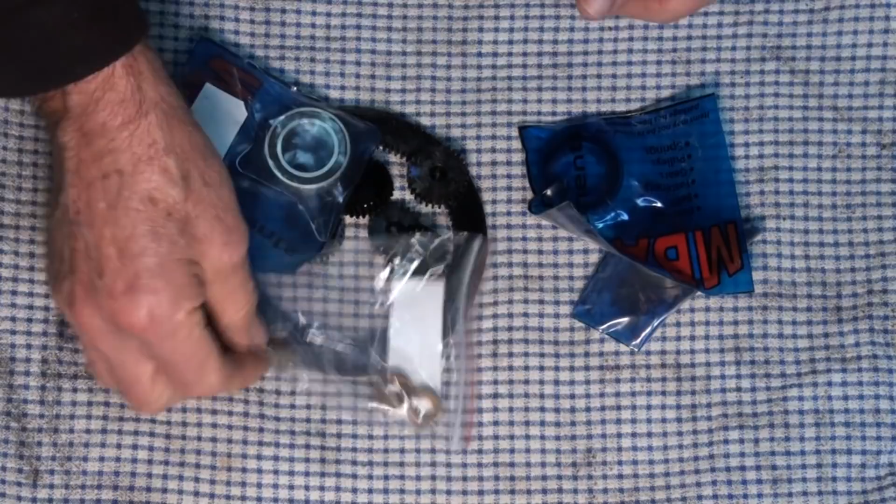Starting a new project today, and here are all the meaty bits that are going to become part of this project. If you are watching this, you probably have an interest in machining and engineering and power tools, that sort of thing.

And I'm pretty sure you've probably come across Mr. Pete, or Tubal Cain as he calls himself. He's done literally zillions of videos on model engineering and engineering processes.

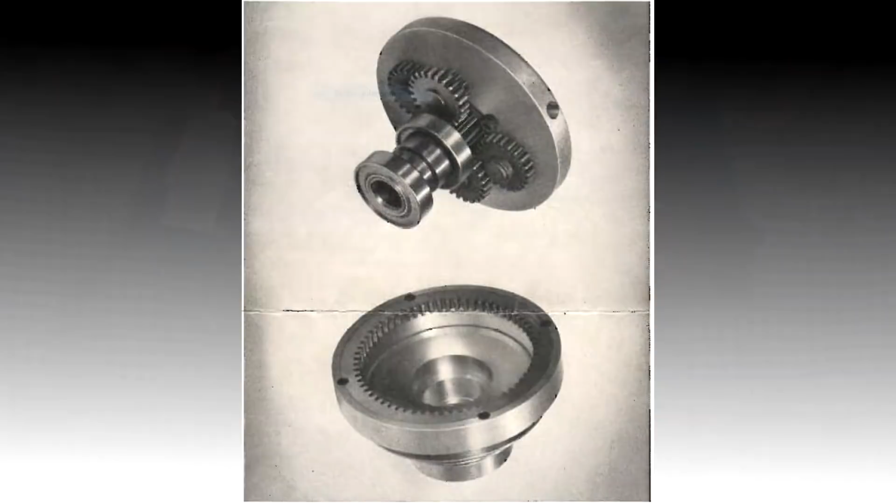One that caught my attention just recently was a device known as a pull gear. These were apparently available back in the 50s and 60s, and they were an accessory for a drilling machine which allowed you to get an extra low range of speeds from the drill press. My drill press, which we'll have a look at in a minute, has the same problem. I cannot get enough torque at low speeds to use large drill bits and large hole saws.

The pull gear is a patented product, but evidently they're not available anymore. In Mr. Pete's video, he showed some patent drawings which demonstrated the internal workings of this thing, and I took one look at it and figured that I can make that.

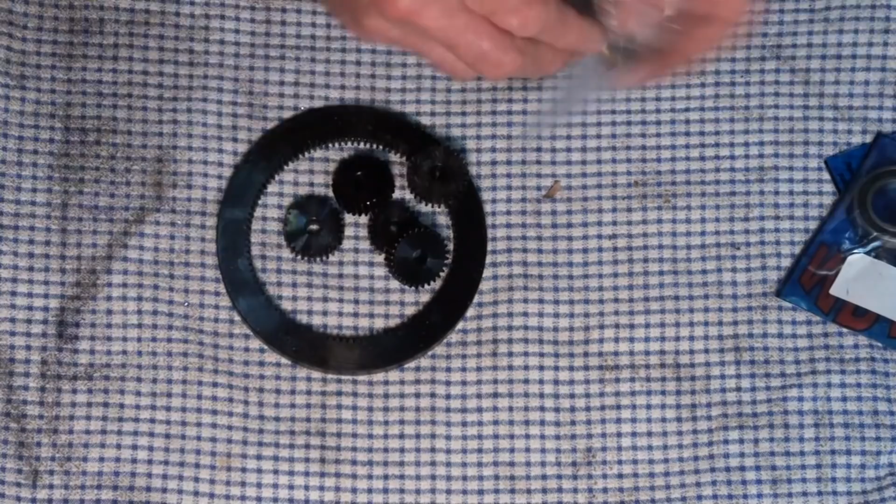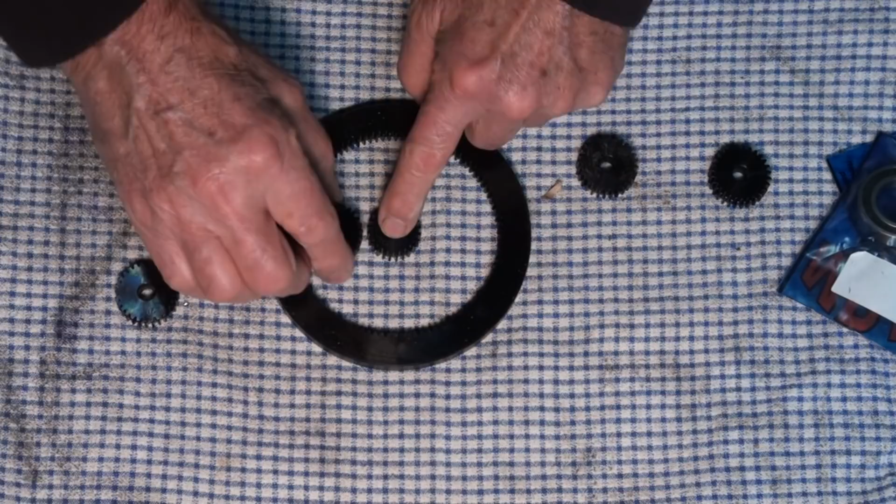So what I've done is I've purchased some gears. I don't have facilities for making a ring gear like this one, but what I have is enough gears to replicate the mechanism that I saw in Mr. Pete's video. So what we have now is an epicyclic gear mechanism.

The notion is that if you were to rotate this central pinion, it would in turn rotate the other set, which are all the same number of teeth, and they in turn would drive this ring gear around the outside. Or if you were to lock the ring gear and rotate the central pinion, then these extra 4 epicyclic gears are going to rotate around that central pinion. That is the mechanism I want to replicate for this drill press.

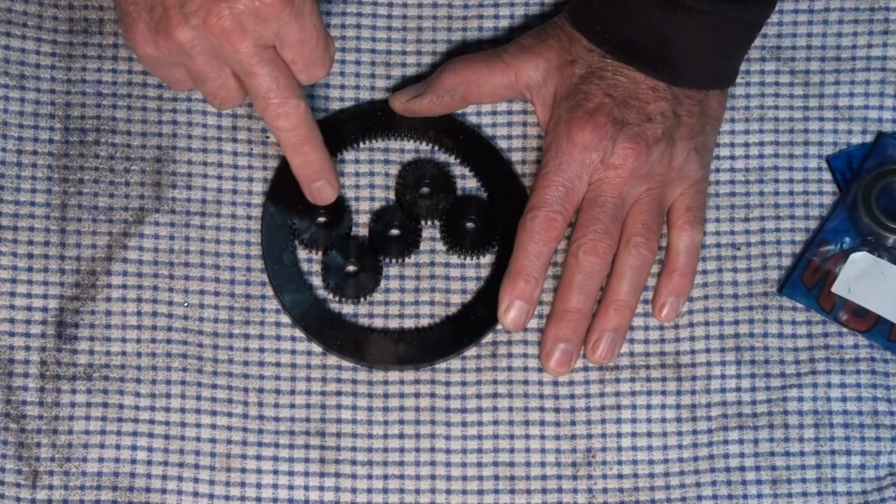So let's take a look at the drilling machine and the problem I have with that, and then let's have a look at the drawings of this device that we need to make.

This is my drill press, a Toolex brand. It was Taiwanese, and I think it was manufactured sometime in the late 70s. I purchased this one second hand. When I bought it, the pulley system on top was partially incomplete. It originally had a 2-belt system driving an intermediate set of pulleys, but because that was missing, I decided to upgrade it to a Poly V drive.

I had read in a magazine years ago that Poly V drives are generally quieter, they run cooler, and they can transmit more torque around smaller diameter pulley sheaves.

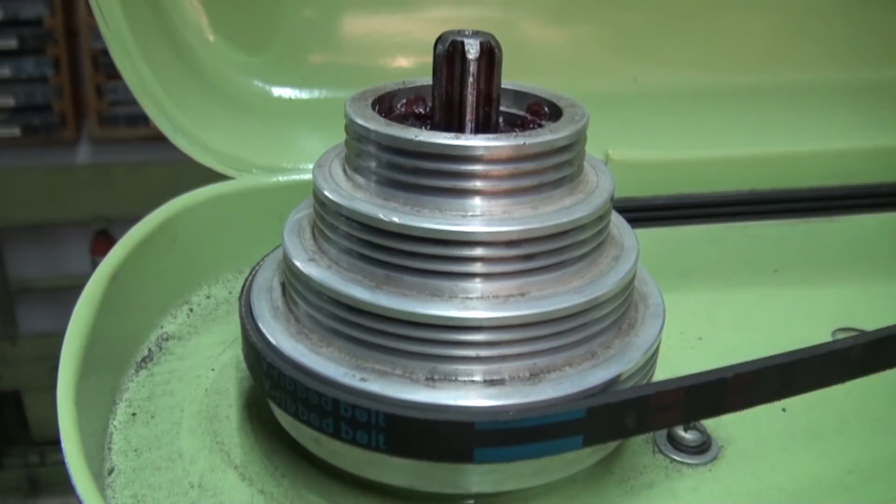The only problem with this configuration is that I have a Huanyang VFD driving a 3-phase motor. I think it's a 0.75 kilowatt 3-phase motor. On 50 Hertz I can get a lowest speed of 480 RPM.

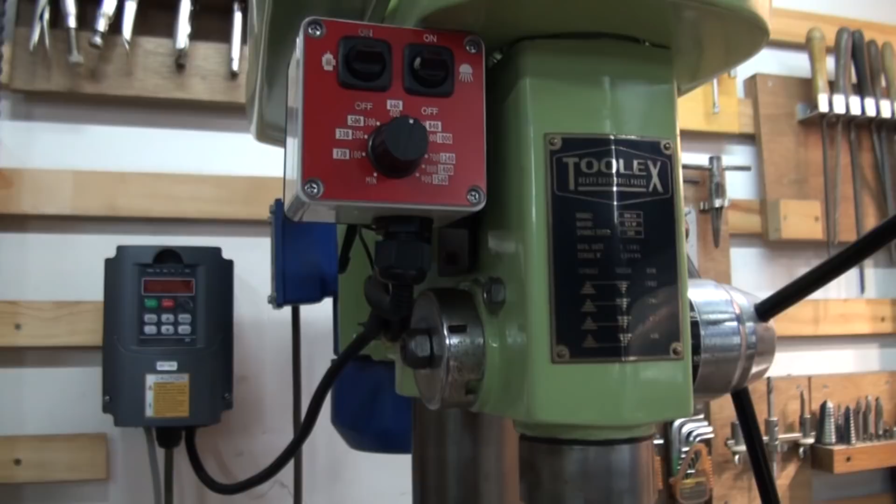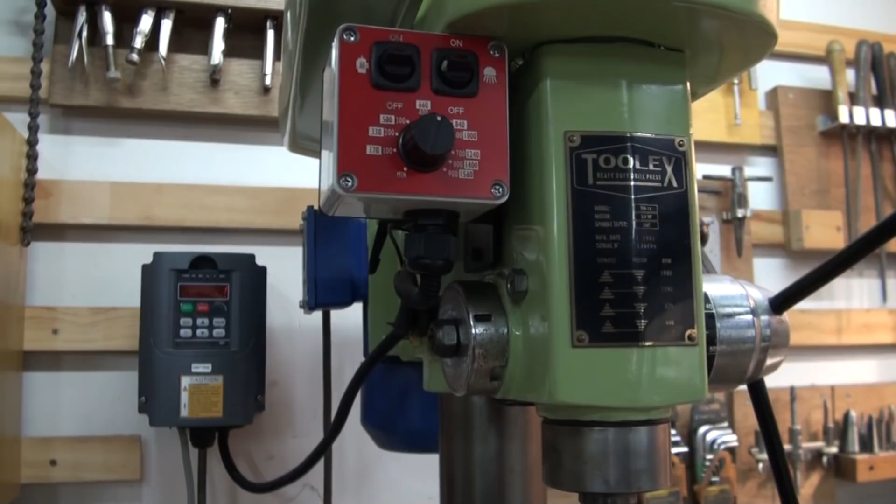Even at 480 RPM, if you're using a large diameter drill bit, say a 16mm or 20mm drill bit, that's really too fast. And if I lower the speed of the motor by adjusting the Hertz, or the frequency of the drive, then the power drops off as well.

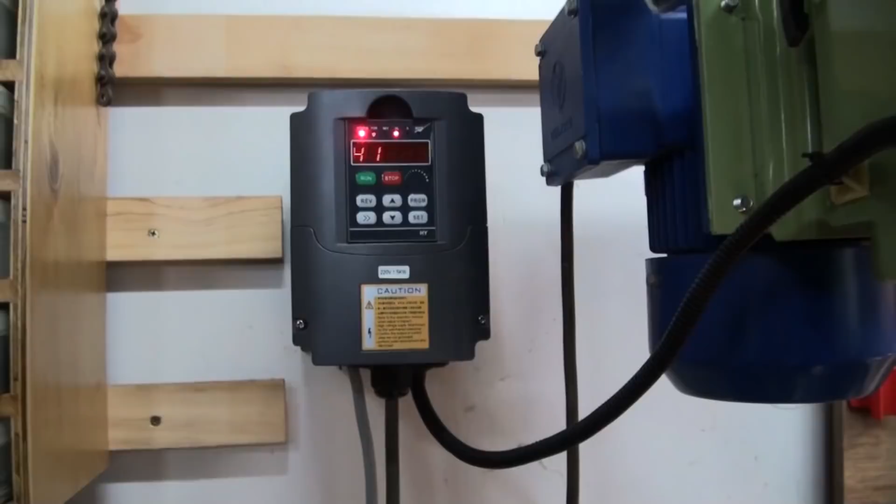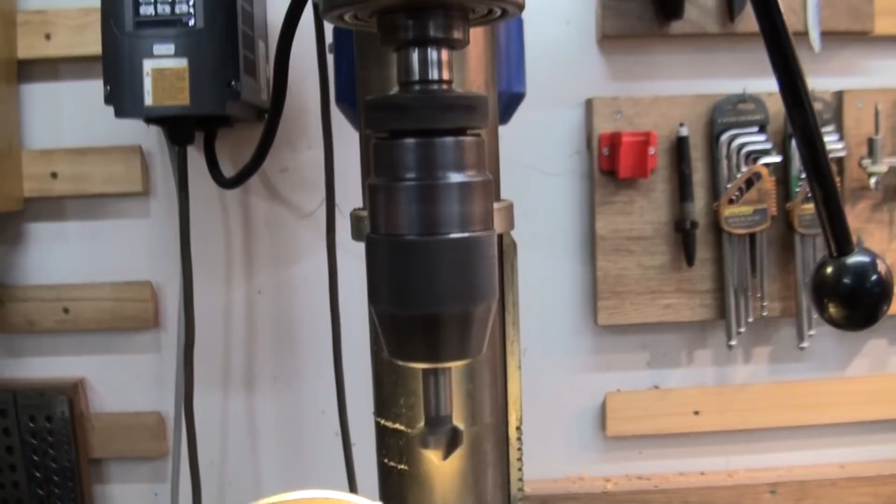I've got the frequency set on the drive at the moment at about 18 Hertz, maybe 19 Hertz, and if I switch the machine on, you can see that on my lowest pulley configuration, or my lowest ratio drive, that's about the RPM that I'd want to run a large diameter drill bit at.

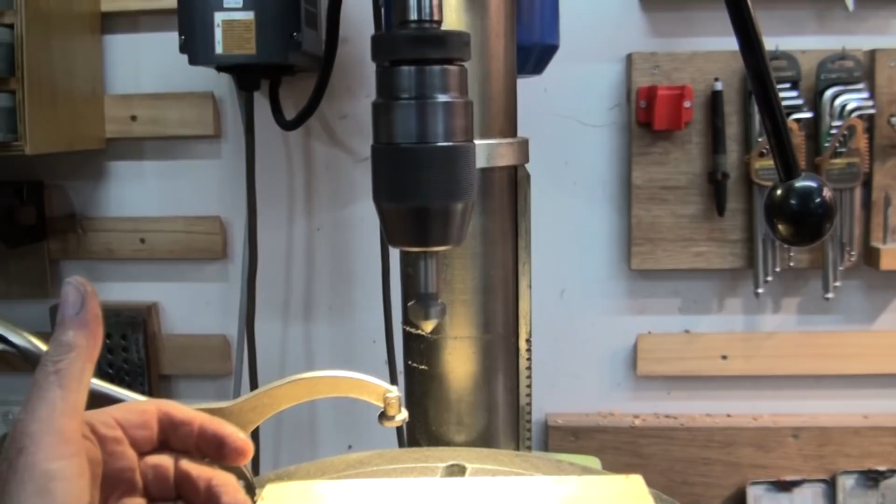The only problem is that when you lower the speed or the frequency, you also lower the torque. So I can just grab hold of that chuck and I can effectively stop it. So that's really not sufficient torque to drive a large diameter drill bit, and that's what I'm hoping this back gear is going to address.

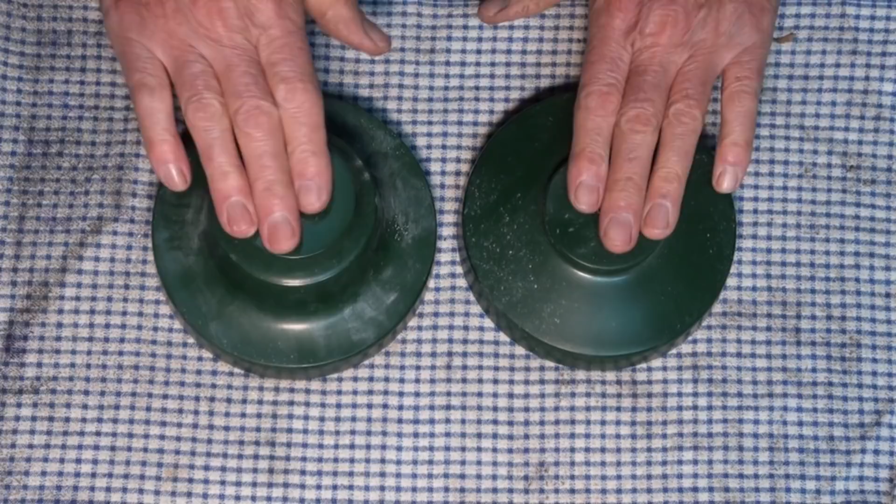Okay, so in order to get this project underway, what I need to do is make 2 castings for this back gear. This is the pattern for the step pulley section of the back gear, and it will be machined into 3 stepped pulleys to take a Poly V belt.

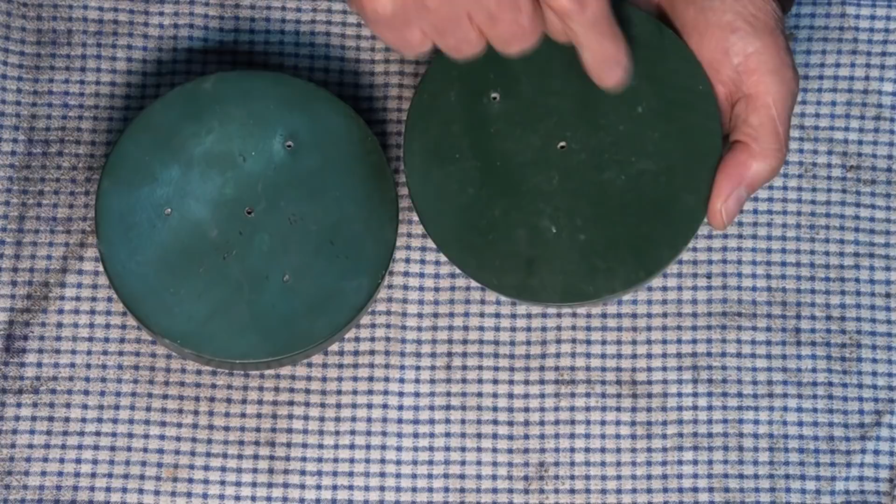And this is the pattern for the cap section, which will take the 4 gears around that central pinion. It will also be locked in place when you want to engage the low speed for the back gear.

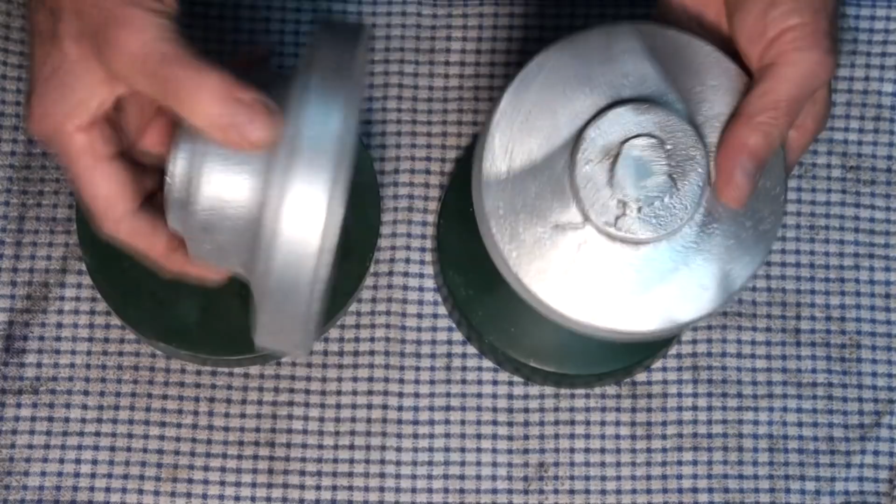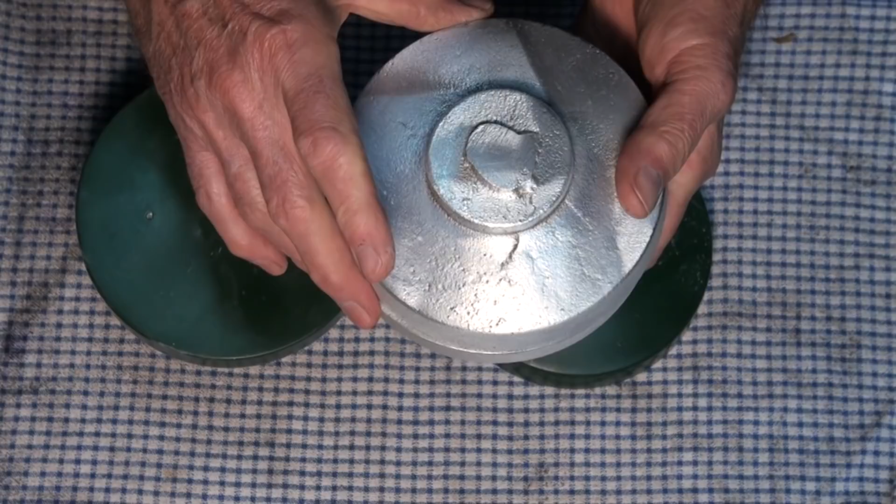These are the castings, and although they're not the prettiest castings in the world, they will serve my purpose. They're also surprisingly quite heavy, which might actually be a good thing. It's going to give it sort of a flywheel effect at low speed, especially when you're doing intermittent cuts like you might get with a fly cutter or a hole saw or something like that.

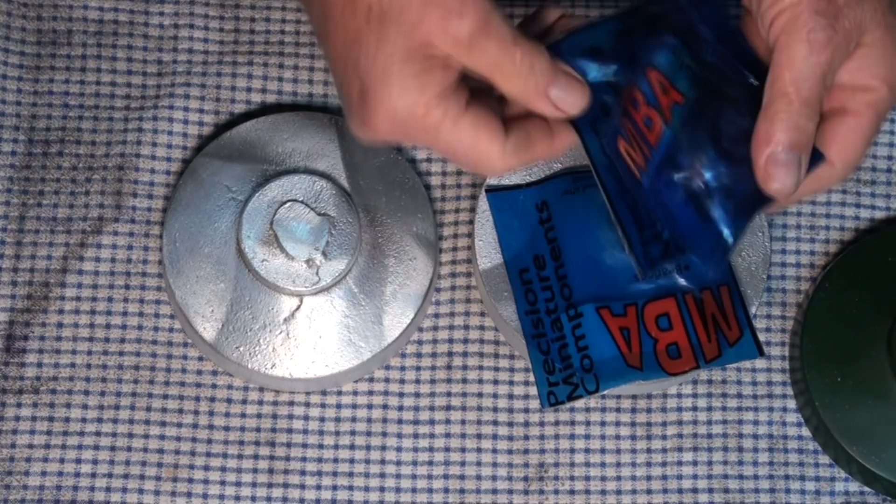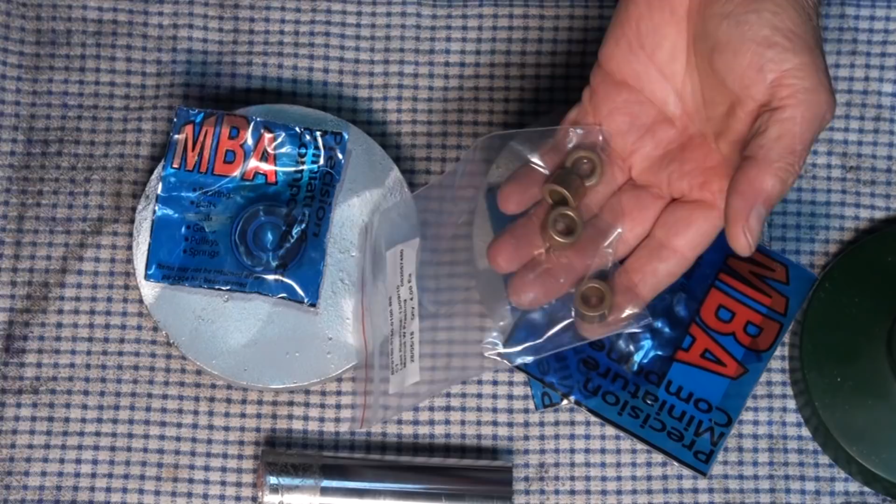Into the finished machined castings, we're going to fit 3 ball bearings. There are 2 that fit around the central spindle, which is going to be machined from this stock here, and the smaller ball bearing is going to fit inside the cap. I also have 4 sintered bronze bushes, which are going to be fitted inside each of these 4 gears that mesh around the outside of the pinion and the ring gear. So these gears are going to have to be bored out, and then the sintered bronze bush pushed in, pressed in, and I can impregnate those bushes with lubricant so that it should run pretty much maintenance free.

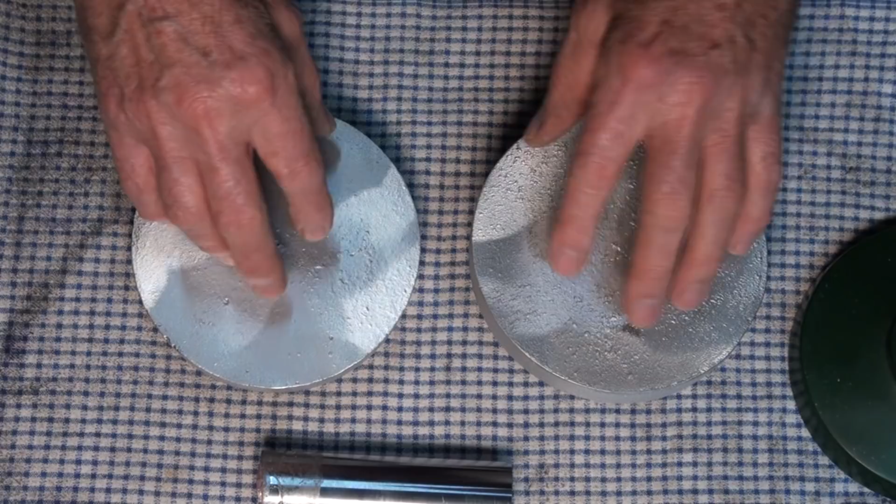I don't intend to show all of the machining process for this project. There's just too much of it. It's more about whether the mechanism works and how effective it's going to be when we're done. And it's going to be fun. We're cutting metal, we're making chips. What else could you want?

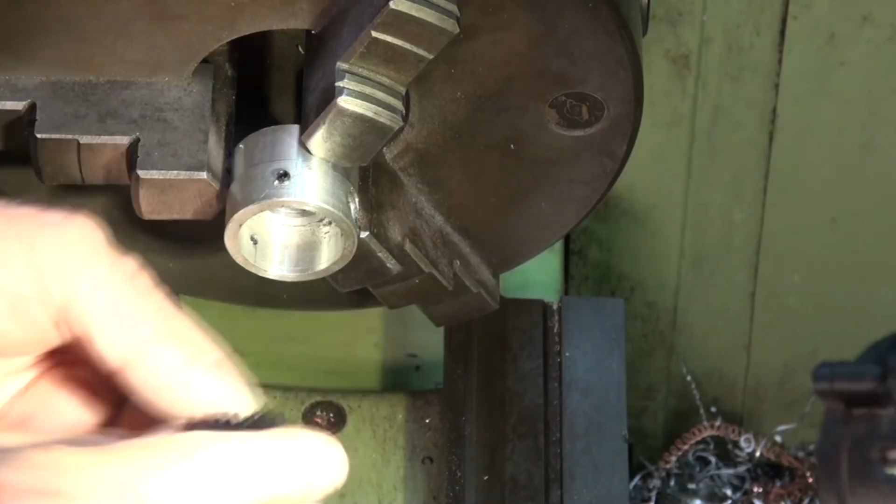Well, the first thing that I actually started to do with this ball gear was to fit the bronze bushes into these idler gears. These are 28 tooth module 1, that's metric, and these gears are unhardened. So when I bought them, they had an 8mm hole in the center, and I wanted to run these on a 10mm stud, and I didn't like the idea of just running these directly onto the steel stud.

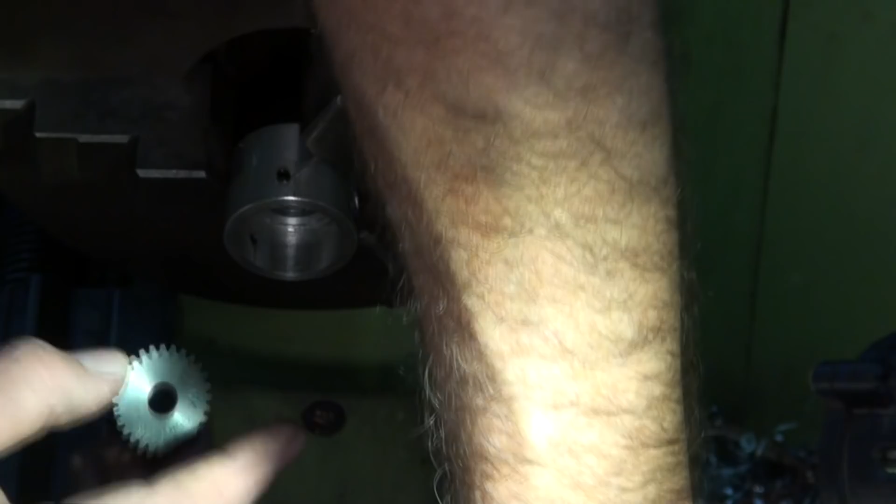So what I've done is I bought 4 sintered bronze bushes. These are 16mm OD, 10 ID, and they're 10mm thick, which is exactly the same as the gear.

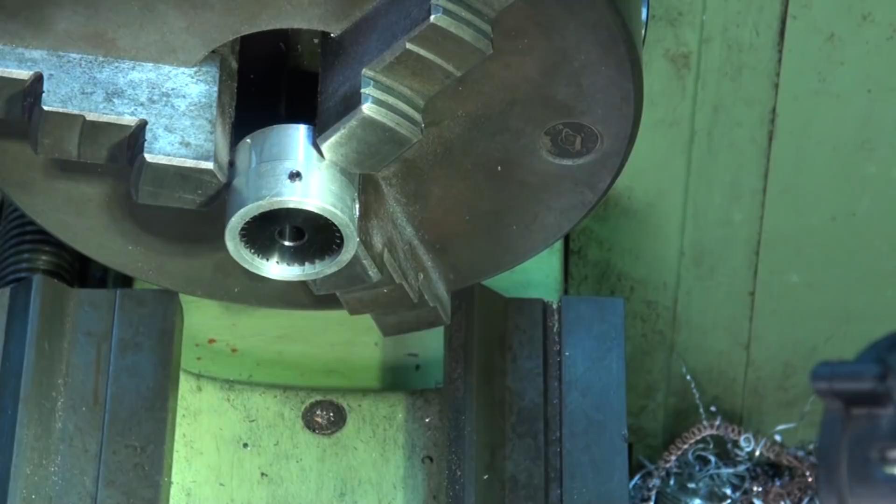So the only issue is actually holding this gear and having it run true while you bore out the center of the gear. So what I've done is I've made a pretty rough and ready sort of chuck, which was machined in place, and the gear is a fairly good fit inside that aluminium collar. The notion is you just press that in, and there are 3 grub screws around the outside, which I just lightly tighten down onto the gear. Now I've already done 3 of these and I haven't had a problem with anything slipping or moving.

So what I'm going to do now is to drill out the center of the gear so I can get a boring bar in there. I'll bore close to size, finish with a 16mm reamer, and then press these bronze bushes in. These are actually just over a thou bigger than the bore, so the finished size of this bush is about 16.04mm, which is just over a thou. So when I ream these to size, the bronze bush is still an interference fit. So let's go ahead, get this one ready, and I'm not going to show you all of it, but it's pretty straightforward.

So you don't want to over tighten these little grub screws, so I don't know where they're actually bearing on the gear. If you're wondering what that big hole is there, that was just in the stock when I started. Okay, let's get drilling.

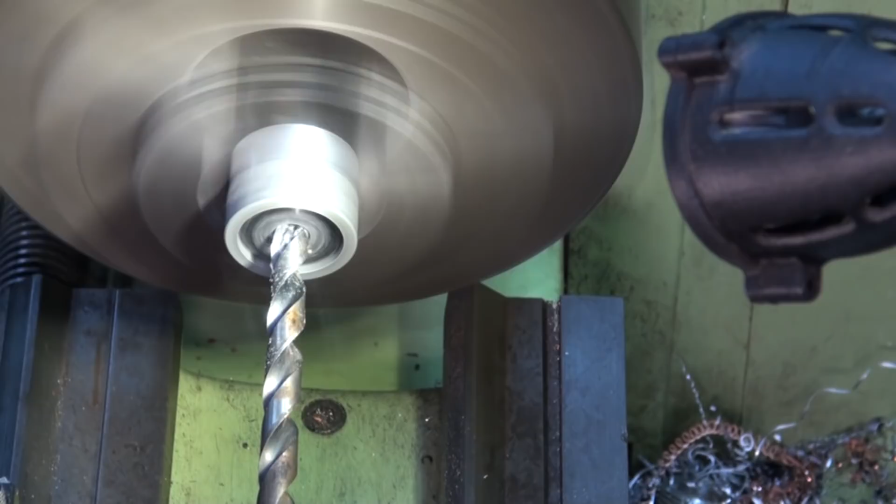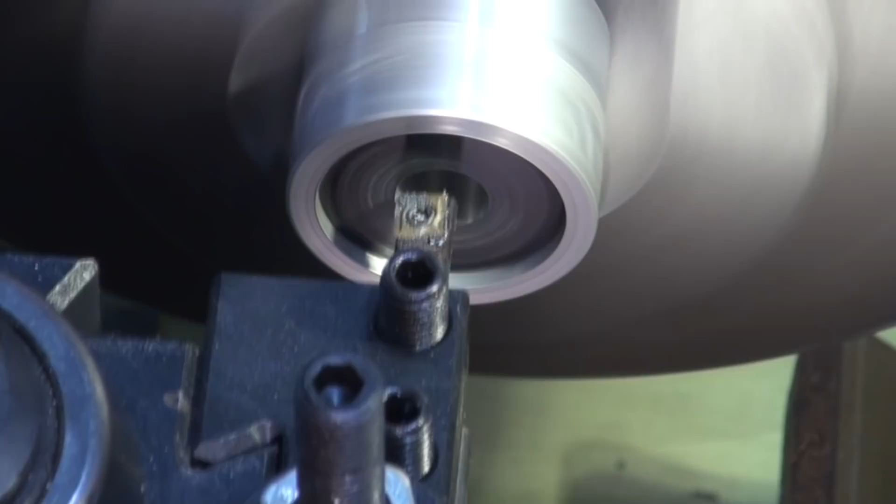Okay, so I've got a 16mm hand reamer in the tailstock, and I'm just going to feed this in at fairly low speed. I want to go through nearly all the way, so the taper is still slightly engaged at the back of the gear, so that as I press that bush home it'll get really tight. You can sort of hear when the reamer starts to cut, it quietens down a bit. And that bush is just starting to engage at the front there, so that's how I'll leave that. So I'll just break that edge and then we'll press that baby home.

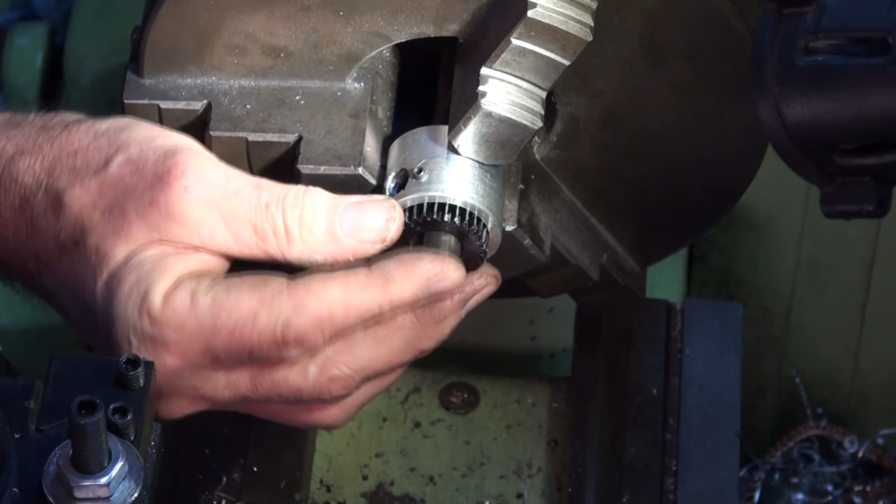Okay, so I'll get that bush in there and those 4 are done. That's the last of the bronze bushes in the idler gears.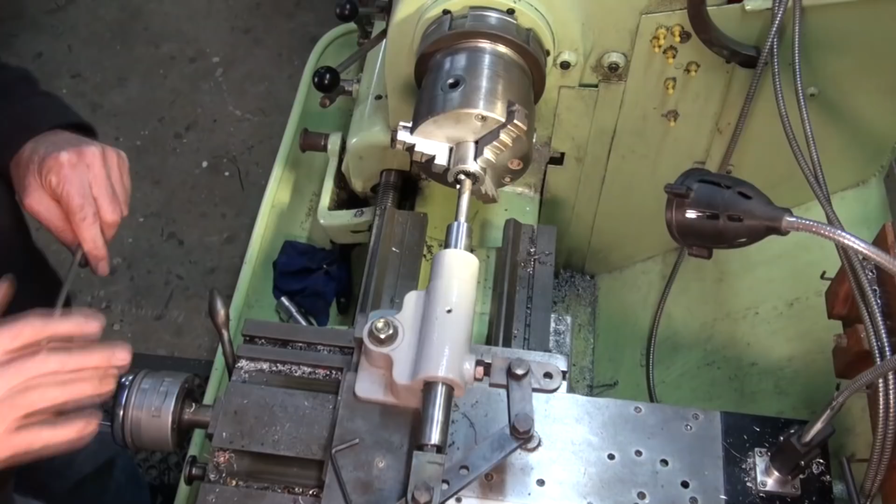All set up for cutting the keyway on the inside of this pinion now. This is just a homemade slotting attachment I made for the lathe, and I've got this 4mm key steel which is going to be used to lock the pinion onto the shaft later. So I've got to cut my keyway - if it was half thickness it would be 2mm, but...

I don't have a lot of metal left in this spur gear here, so I think I'm going to probably only cut about 1.5mm deep, and I've got my cross slide set, so as I'm cutting this I can monitor how deep that is. This is a fairly tedious, slow sort of operation, so I'm not going to show you all of it. Let's see how we go.

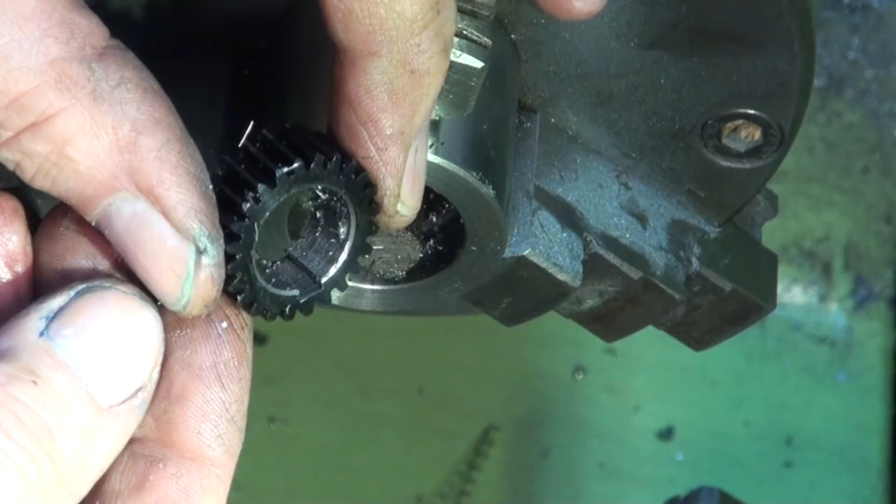Okay, well there's the keyway. I think I'm going to have to do a little bit of cleaning up to get the key to fit. It's not quite going in there, which is probably a good thing.

Okay, I just gave that a bit of a clean up with a needle file, and the key is now fitting in there quite nicely. It's sort of a firmish fit, which is what I want, and it's engaging in there deeply enough to stop that from spinning on the shaft. So I'll put this aside now.

I'm going to turn the shaft to match that 16mm bore, and I'll just have to cut the keyway slot in the shaft with a 4mm end mill.

Just finishing off the journals for the two bearings in the lower half of the pulley. These are going to come in at 25.02 or .01, so I've got a press fit for the bearings. So there'll be one bearing here, one here, and I've already finished this size, which is just a boss to take a locking screw so this can be fixed to the motor shaft. That size isn't critical - these two have to be right, and there'll be another bearing journal up here.

So I'm doing this all between centers, and I'm using high-speed steel tooling. This is a tangential tool holder, which is a bit problematic - it gets in the way up this end here, but I tried using insert tooling and I just can't get the speed high enough to form decent chips, and the finish was pretty awful. So I'll stick with the high-speed steel, and I've got a lathe file here which I'm using to dress these surfaces when I'm done, because the finish on this isn't brilliant.

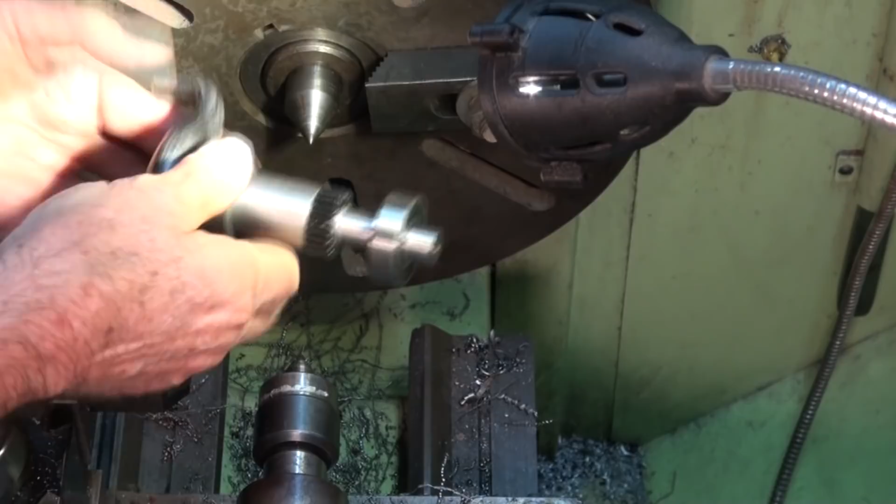Well, there it is, nearly finished, at least on the outside anyway. I've got that pinion pressed on there, it's sort of just a nice snug fit, which is what I wanted. Top ball bearing is sort of getting tighter as I push it down. I wanted this to be a little bit undersized at the top here. There'll be a bearing either side of this boss here in the center.

The next step is to start boring this out. It needs to be bored out, I think, 3 different diameters. The first one being for the motor shaft, and then there'll be a through hole right to the top where a spring will be fitted, and the latch that actually actuates the back gear has to fit into a slot in the top here as well. So it's still a bit of work to be done, but I'm happy with what I've got so far.

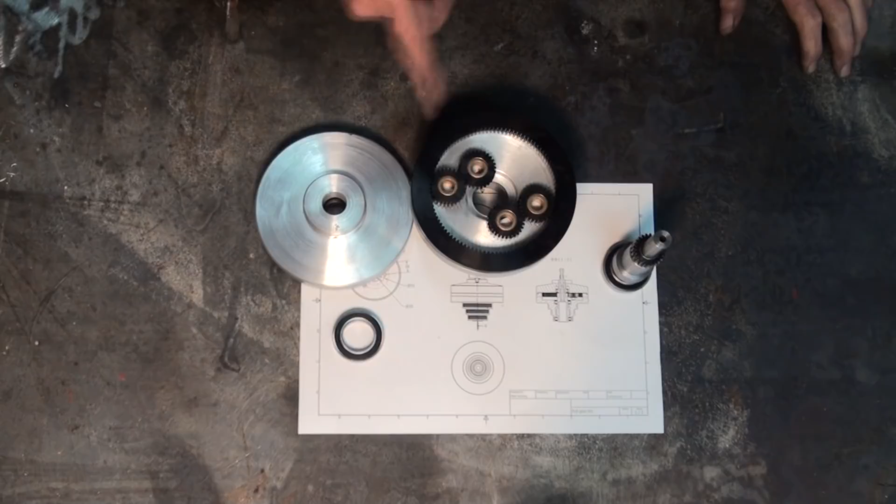Okay, status report. I did a lot of machining today, about 5 or 6 hours on all of these parts, and some bits were really successful, some were a complete dismal failure. So let's start with the good ones.

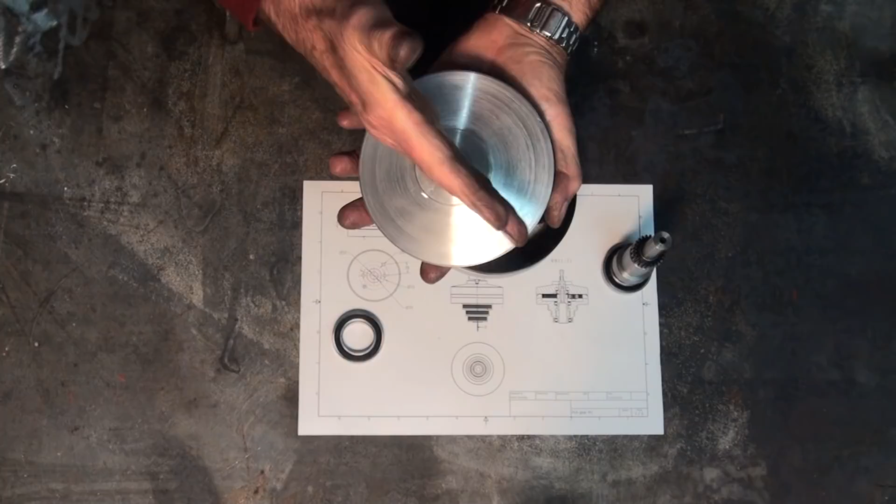This top cap is now almost finished except for a single slot across the top here. That's where the latch will either drive this cap, or if you lift the latch up and rotate it, it will allow the cap to just freewheel, which is how you get the reduction gear. So this turned out quite well.

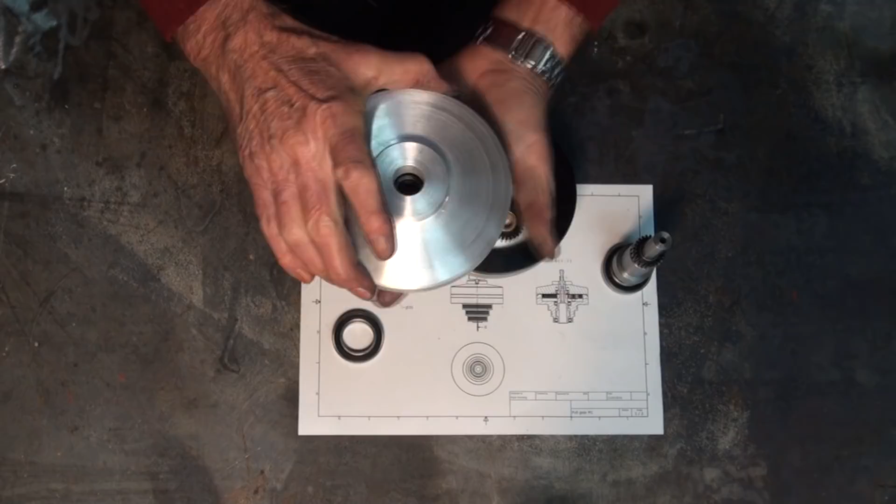I've got the single bearing just almost pressing home there now, and I'm not going to do anything with that until I finish all the machining. Oh, and by the way, there needs to be a drilled hole in the side or the circumference of this part, and it's going to be there so that a rod can be inserted into that and attached rigidly to the drill press. What they will do is actually lock that cap in position while the rest of the assembly spins. So that's also got to be done. So that bit, thumbs up, all going well.

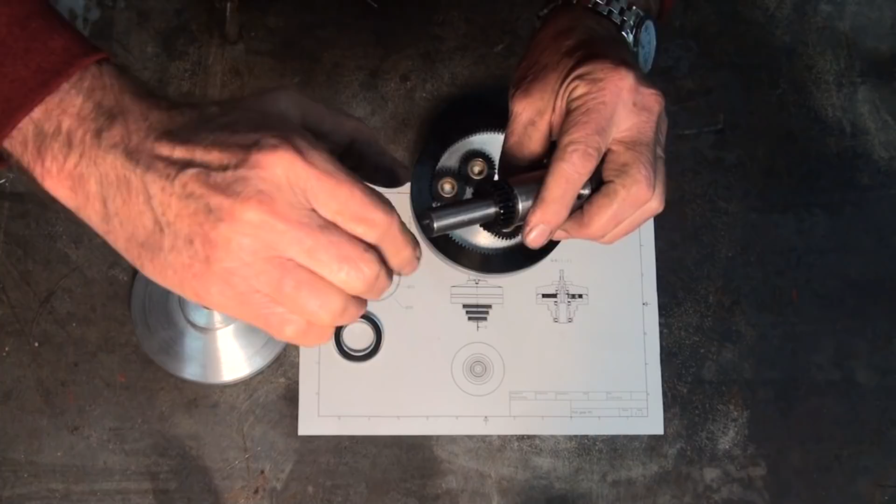I've also finished the central spindle pretty much, except once again for a slot across the top here, which is where the latch will allow you to lock or unlock this part. Spur gear sliding on, the bearings are going on there. There's a single 6mm threaded hole for a grub screw which will lock this to the motor shaft, and there's an 8mm threaded hole which is going to give me a chance of putting a key in this part.

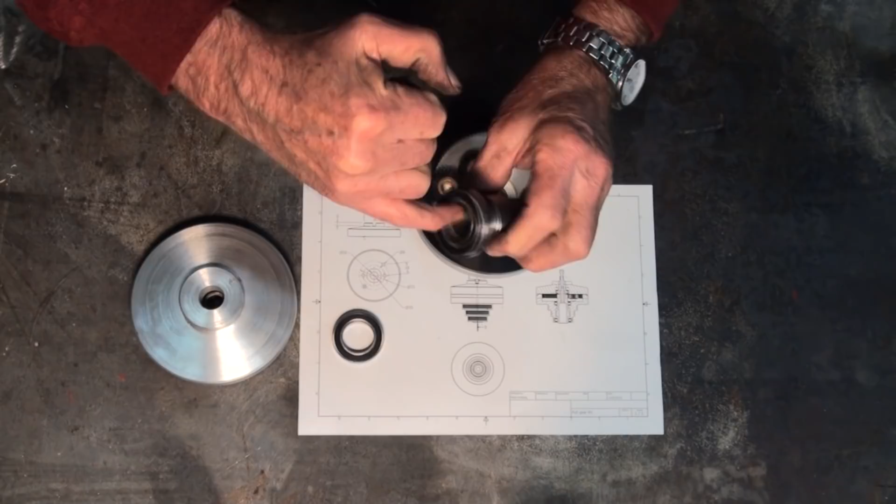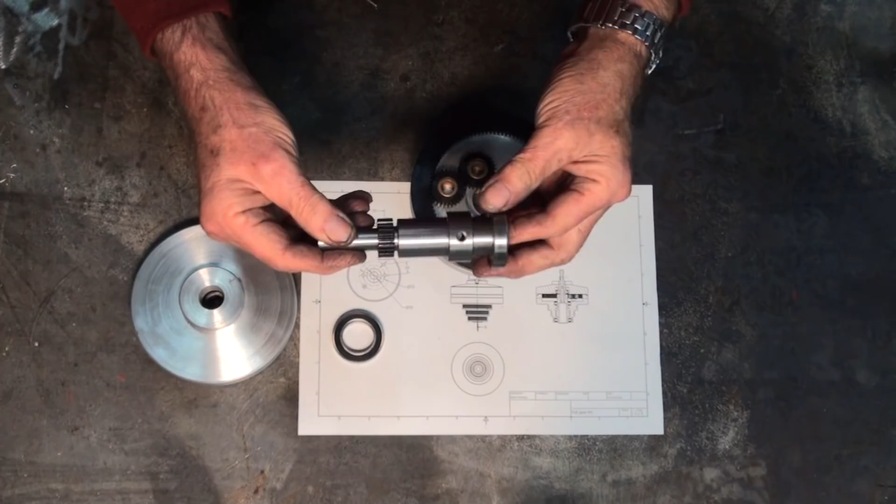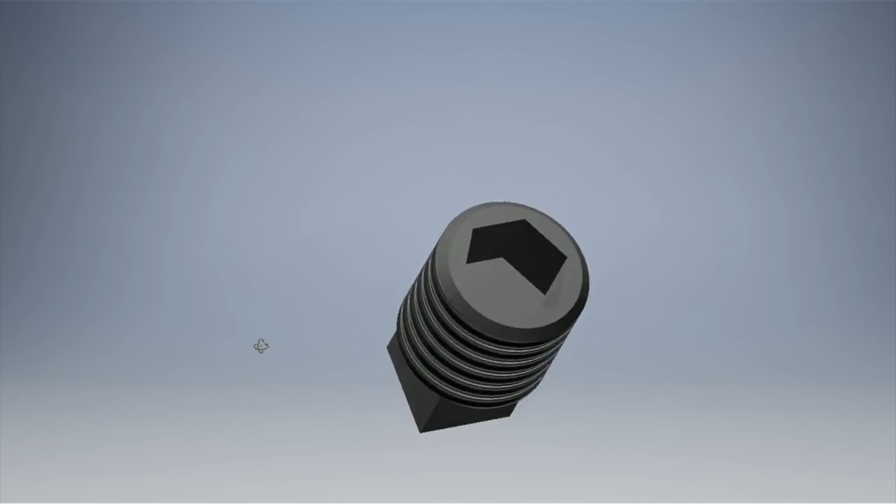Now I did think about using that slotting attachment to put a groove on the inside of that bore, but this is quite hard steel and I didn't like the chance of getting that, and I also didn't want to weaken the inside of this bore at all. So later on you'll see that I'm going to insert a grub screw with a square head on it, and that will engage in the groove of the motor shaft. So that bit, all looking good, happy with that.

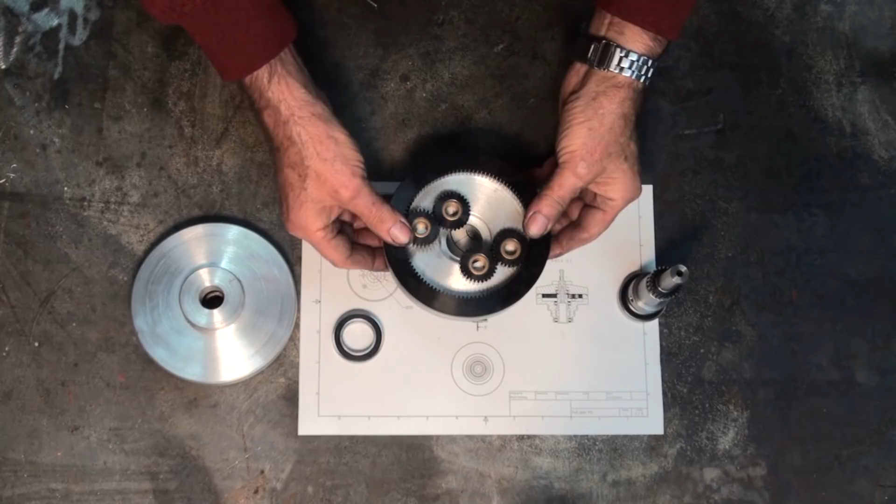I also did a lot of machining on this bottom assembly, and you can see the ring gears sort of ready to go on there.

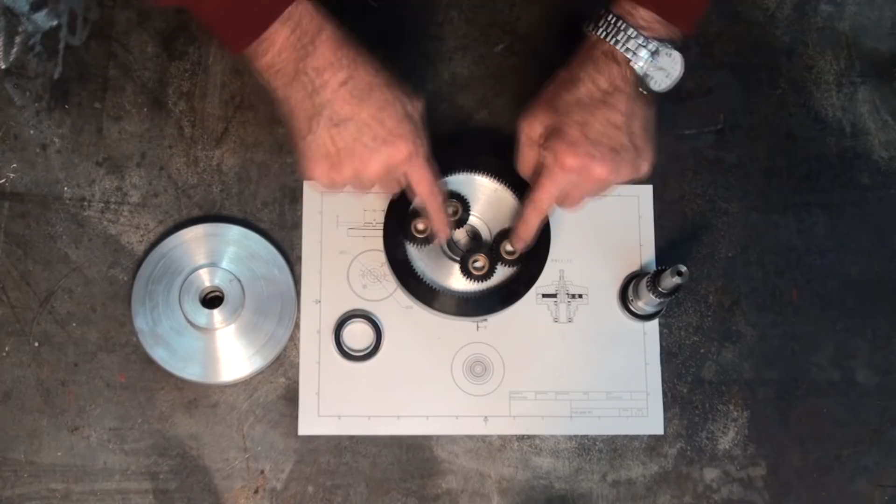That'll be held on with 6 M4 countersunk screws. The idler gears are all done and ready to go in place. They'll actually be fitted onto the top cap with studs, but for now you can just see how that assembly is going to work.

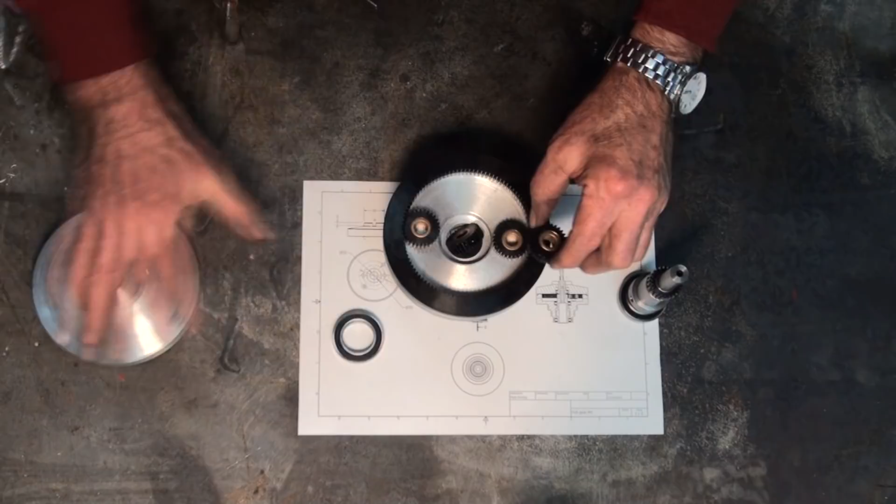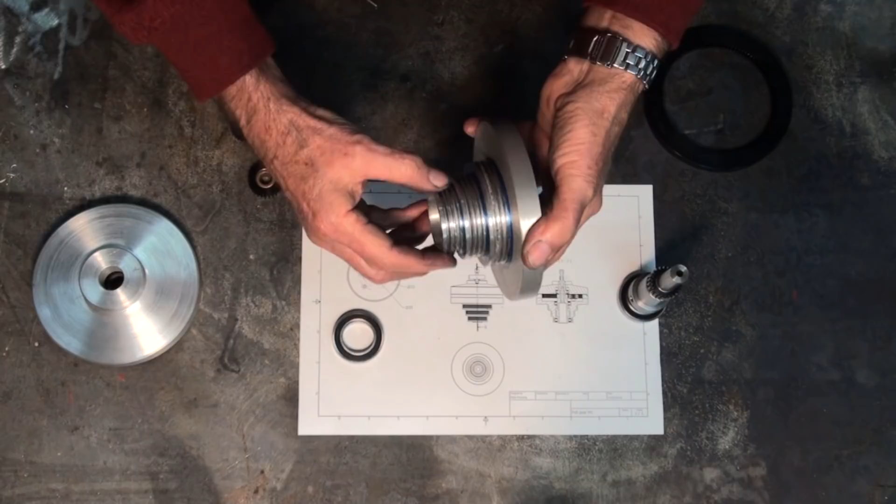I got to the point where I needed to machine the pulley grooves, or at least the V grooves for the Poly V drive. I had a 40-degree included angle form tool which was just plunge cut straight into the stock, and I was doing the first groove, right at the very center, and almost finished, when there was a horrible crunching, tearing sound, and I realized the tool had dug in.

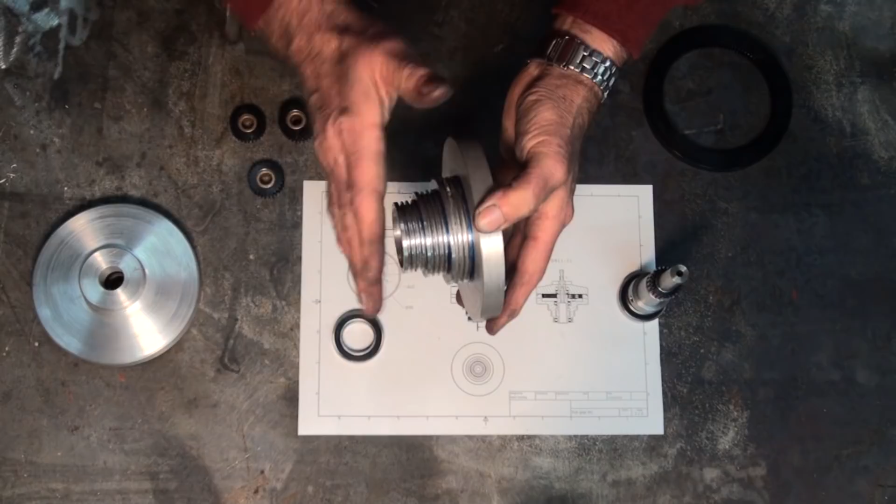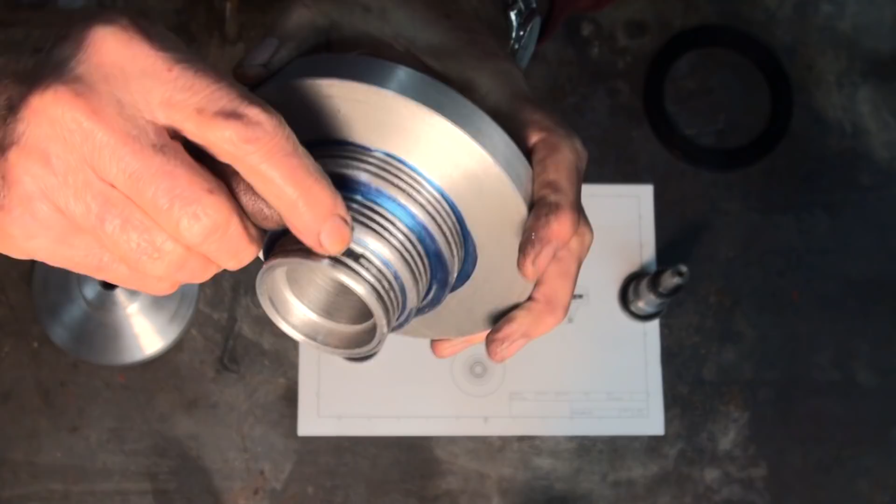I cleaned it up to the finished dimensions and kept going, and stupidly cut all 9 of those plunge cut grooves. Then I got the air gun, cleaned it all out, and realized there were pieces completely shattered, smashed and torn out. So that was a bit of a blow, and I said a lot of bad words.

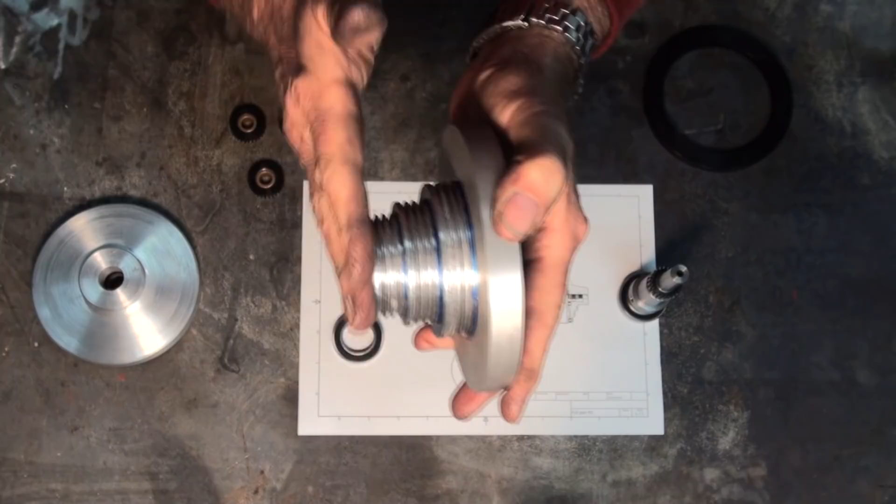I walked around the workshop for a while, kicked a few things, calmed down and realized this is a total loss. I went ahead anyway and finished it, finished the bores inside, and got all the bearings fitted and so on. I'm going to use this as a sort of prototype, I guess.

What I'm doing now is chasing down a piece of 6061 T6 alloy, 140 diameter, 60 long, and I'll carve out a new one from a better quality alloy. I don't know why this failed. I was using WD-40 as a coolant and lubricant, and taking it very, very slowly, but for some reason it just built up on the edge and tore the guts out of it.

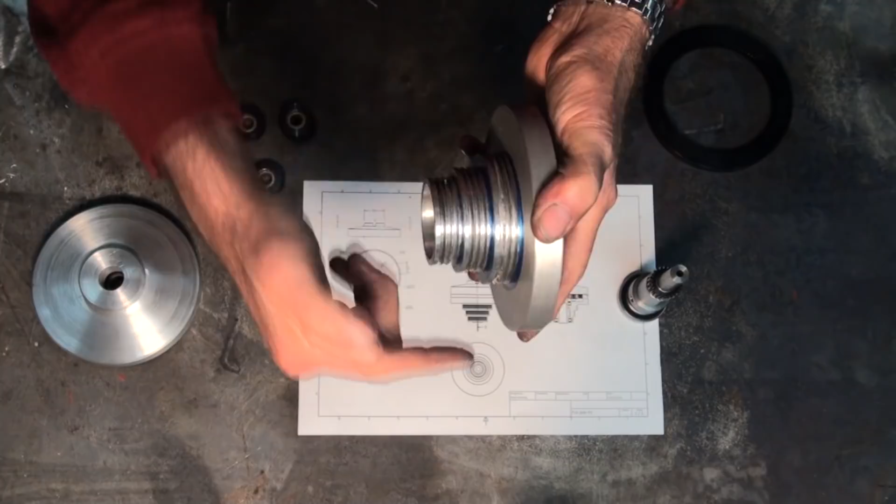So yep, that's a total fail. No, not a fail, it's a setback, but I'll keep it - it would work. If I put the belt in there, it would drive and it would work, it just looks awful. I'm going to wind this video up here, it's going to be way too long, and in the next episode we're going to hopefully get all the parts made and do a trial assembly and just see whether it works.

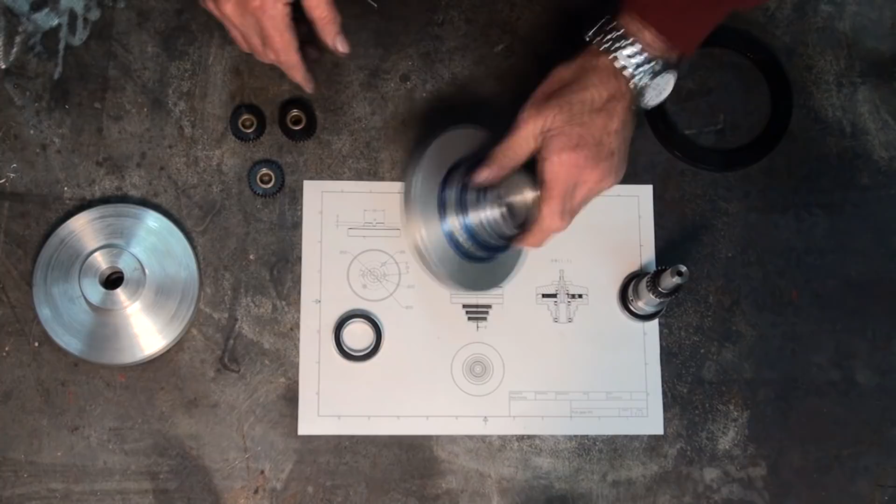I'm keen to see how much reduction I can get with this. My calculation is that it should be almost 5 to 1. This ring gear has 100 teeth, and this little driver in the center has 21 teeth.

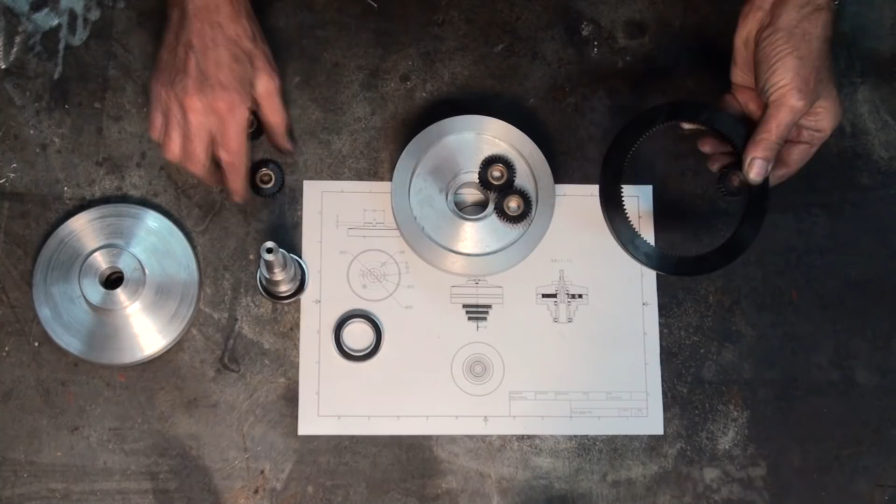My understanding is that these idler gears don't affect the ratio of the finished drive at all. They just simply transmit the central spur gear's torque through to the ring gear on the outside. So in a way it wouldn't matter how many teeth these idler gears had, it wouldn't affect the finish ratio. My calculation is I'm going to get about 4.8 to 1 reduction.

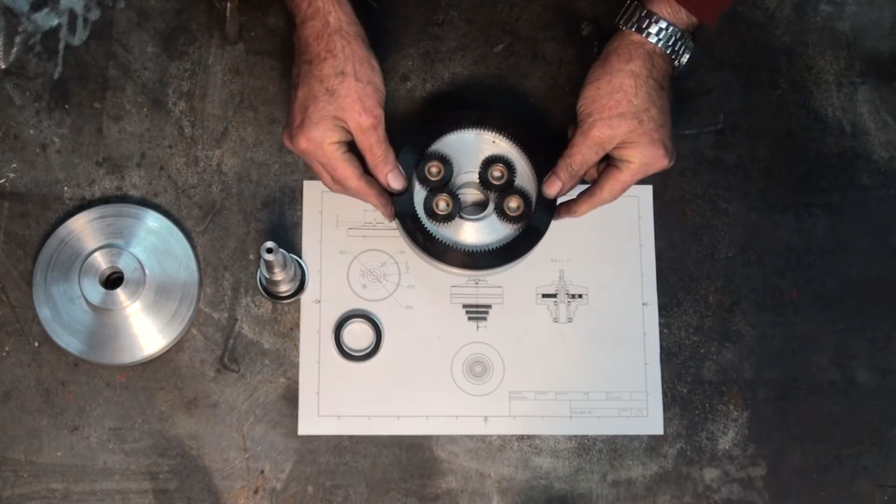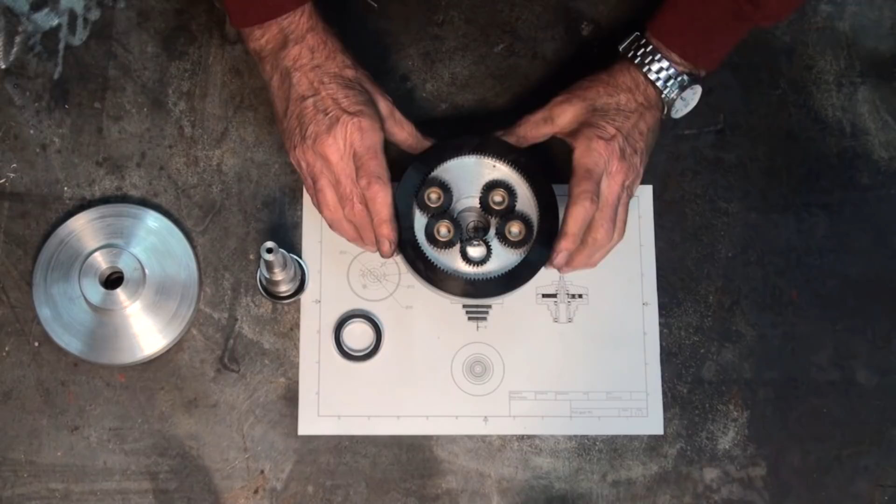In the video I watched with Mr. Pete, he said the one he had was going to give him a ratio of about 7 to 1, which I don't understand. With the physical dimensions of his assembly and the number of teeth you can effectively get into it, I don't know how you do it, unless there's a sort of double reduction, and in his assembly he wasn't able to get it apart. I haven't seen inside the one he's got, so I don't know how that works. But nearly 5 to 1 is going to be okay for me.